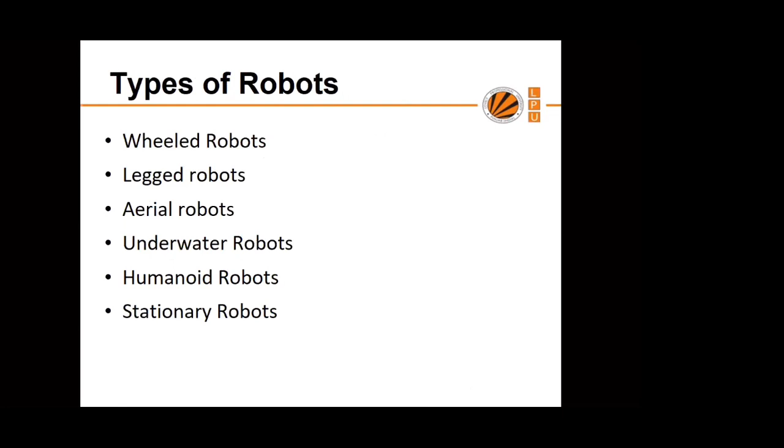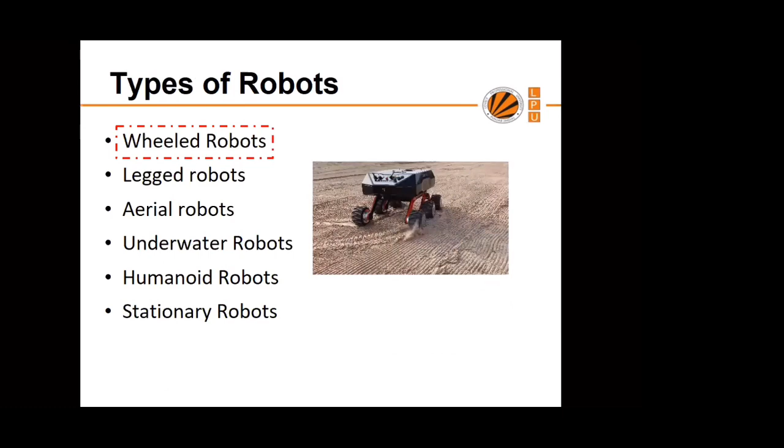So as I already mentioned, there are different types of robots. Some are wheeled robots - this is one example. Robots that perform tasks and have wheels, we can categorize as wheeled robots. Then as legged robots - instead of wheels, if a robot has legs...

...then we can term it a legged robot. It can be designed for different tasks, whatever task you want your robot to perform.

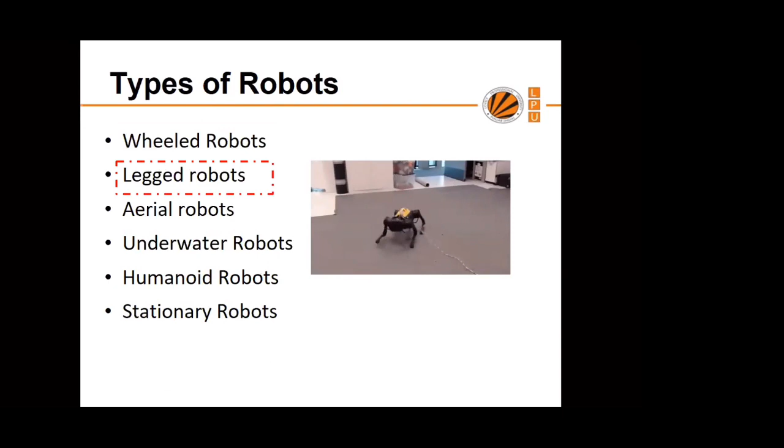It is just designed based on that particular requirement. Then aerial robots - I think you might all have seen drones, and drones are basically aerial robots.

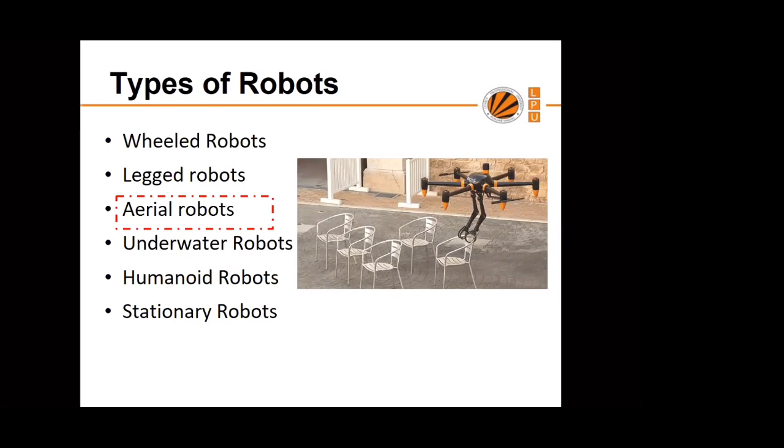Here is one example of a drone, or aerial robot, taking a chair from a particular place and keeping it somewhere else.

After that, we have underwater robots. Underwater robots are basically for the perception of the underwater environment and about aquatic life, so for those we require underwater robots.

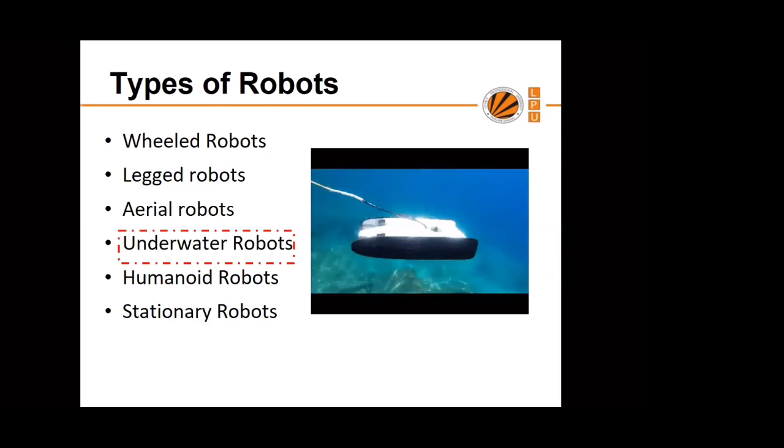After that is the humanoid robots. Humanoid robots, as the name suggests, will resemble humans, and they will be designed based on some artificial intelligence techniques...

...so that they can resemble us, and they can perform tasks as humans can, but with high speed and more precision.

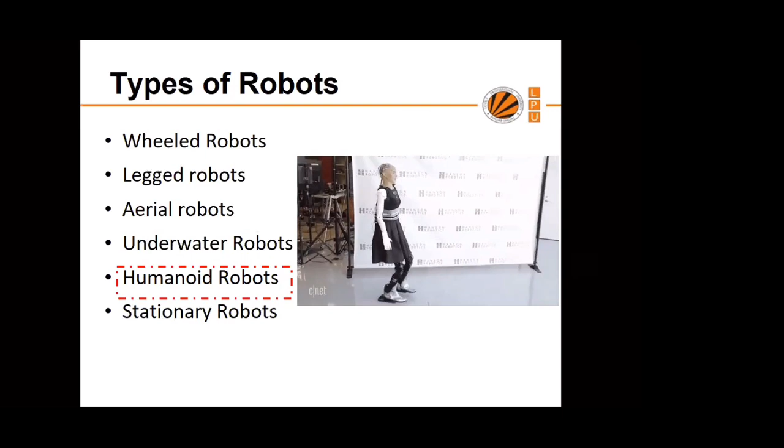After that, it is not always like that the robot should be moving. It should have some wheels, legs, or some humanoid effort so that it can move from one place to another. But some robots are stationary also.

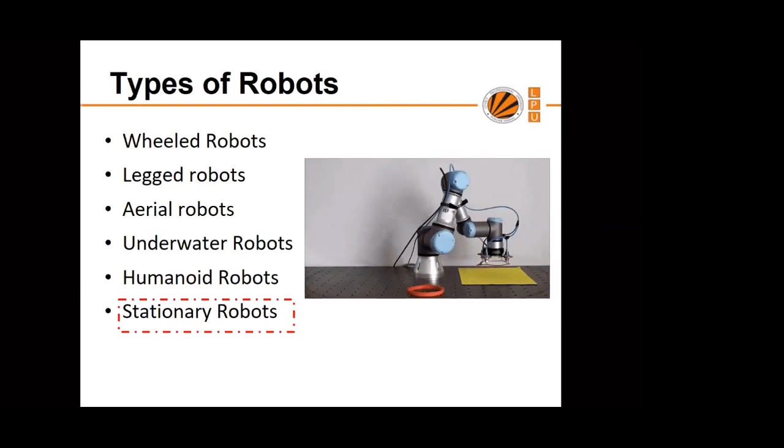We will be going into much more detail about these stationary robots in today's webinar. Stationary robots are those robots which are fixed at some place, but they are performing some task. Like you can see in this picture, a robot is fixed at a place and is picking and placing a particular thing from one place to the other. This type of robot is basically known as a robotic arm or manipulator.

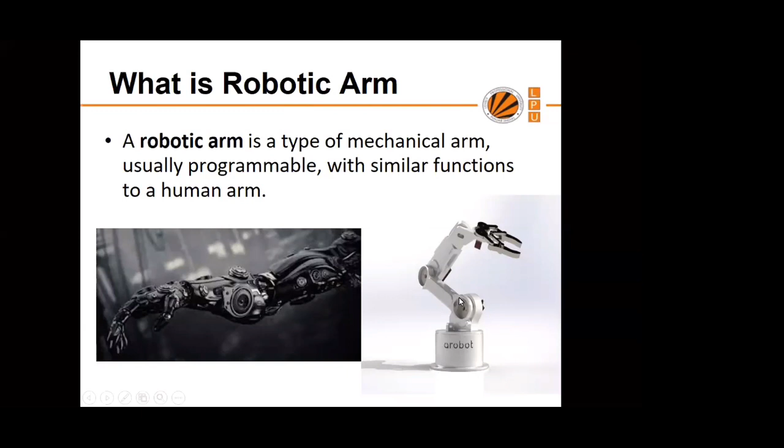There are different components of a robotic arm. The first one is joint and actuators. If we want some mechanism like our human arm, we will have some joints, like our elbow - that is one joint in terms of robotics. That joint is required so it can connect the arms. The shoulder is another joint, connecting with the elbow. In between the shoulder and elbow there is some segment, which is termed as a link.

After joints we require some actuators, because we require some mechanism which can move that particular joint or link. So for that we use motors.

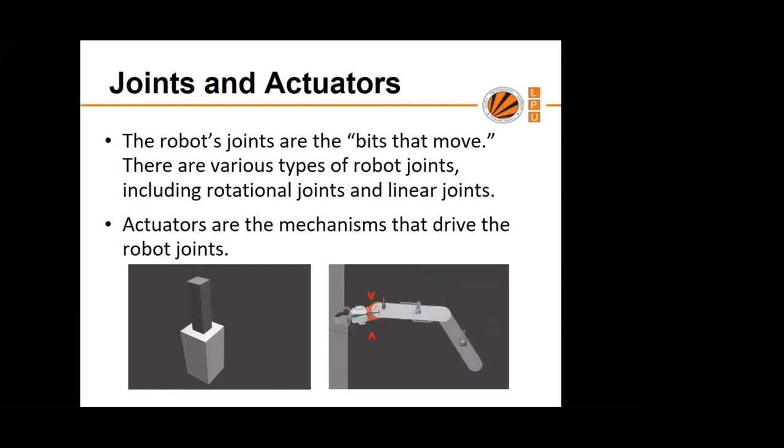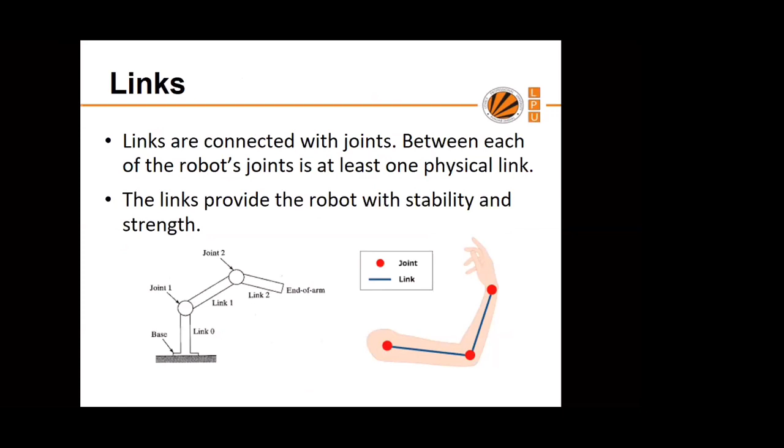After that is the links. As in the right image, these red points are basically the joints, and in between these joints we have one segment, shown in blue color, which is known as a link. These links are basically interconnected between two joints, so we require at least two joints to connect one link in between.

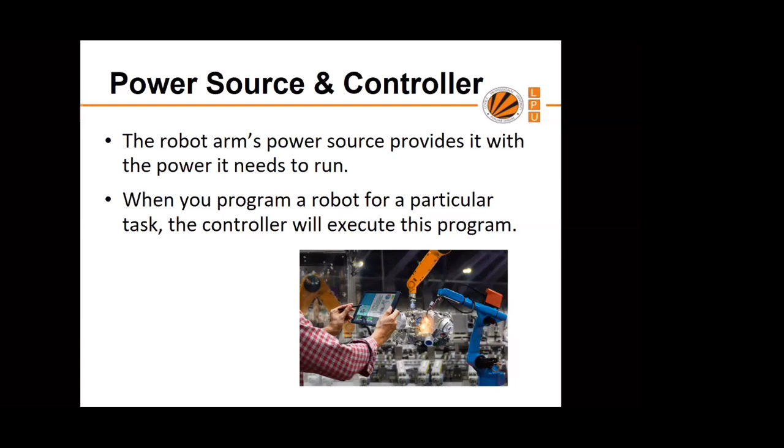After that, obviously, power source and controller, because without power we will not be able to initiate any action or task with the help of a robotic arm or any type of robot. The controller basically executes all the programs and applications that we have designed, and with the help of the controller we can execute all the tasks.

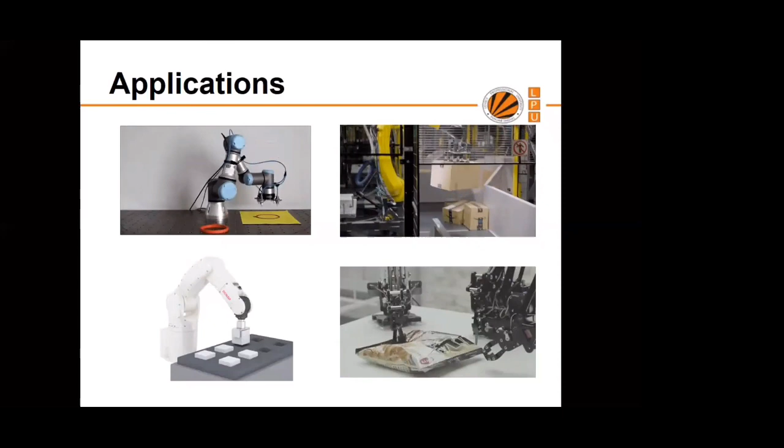So these are basically some of the applications, like picking and placing an object - you can see in the right image that the box has been picked up and placed somewhere. Then there's stacking, and packaging also. These are basically industrial applications where robotic arms are used these days.

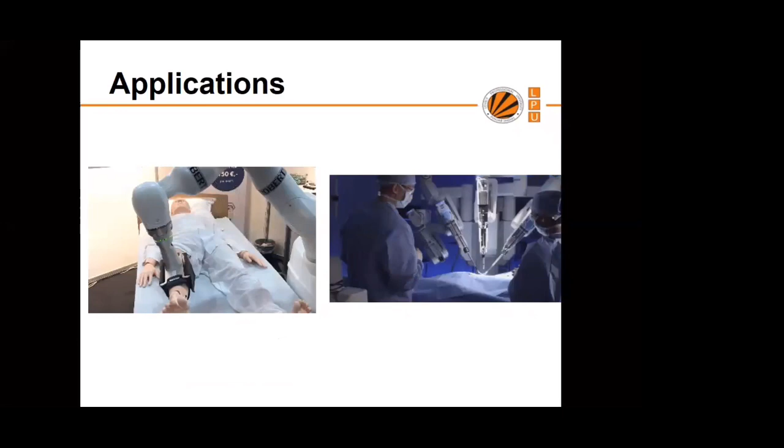Another application is in medical for rehabilitation and for surgeries. These days in the medical field we are having robotic arms to make the work more precise. Then in industries, like automobile or car industries, we actually have robotic arms so that at a single moment we can have multitaskable performance in a particular industry.

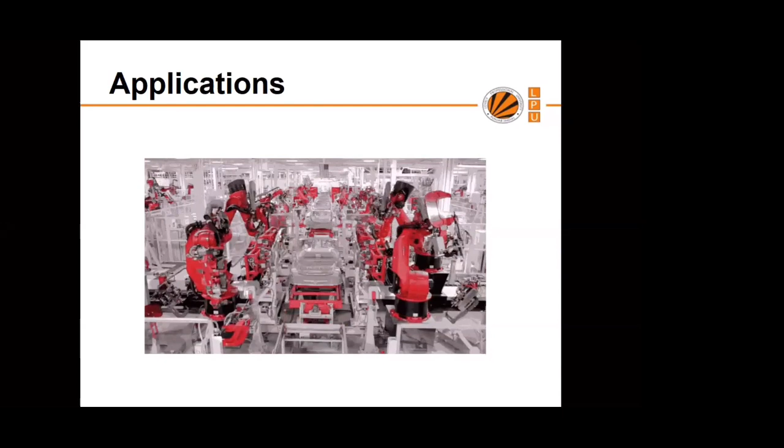I will now be showing you one of the manipulators that we have in our lab. Just let me open that.

Right now I will be showing you how we can make this robot teach. I will be teaching it, and then I will be letting this robot perform the same task. So for that, I'm sharing the screen for this robot controller. This robot is basically having multiple tasks, like it is...

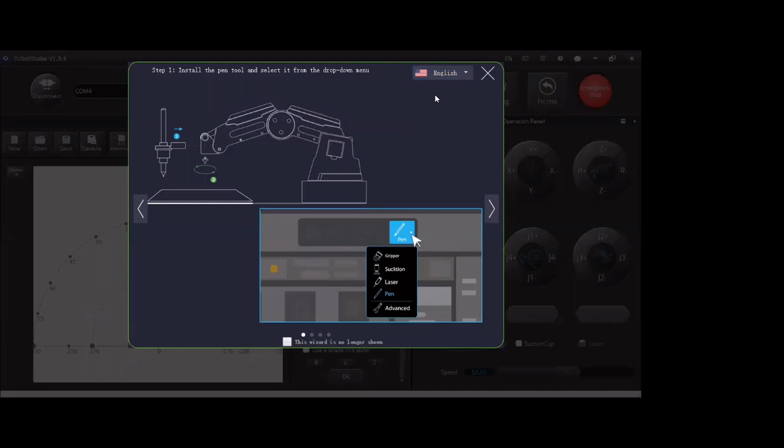Now I will be showing you how we can write and draw things, whatever I want to write or make the manipulator draw, with the help of the manipulator itself. This is basically the interface where we will be writing or drawing something, or if you want to make this manipulator draw some character, you can take that image and incorporate it into this window you are able to see.

This is basically the area where this LPU, you can see, where I am making it rotate. This is the area where your manipulator can write, the region where your manipulator can easily write or draw something for you. So what we have to do in this case is, obviously, as right now the end effector is connected at the end of the manipulator, we are having this suction pump.

And with the suction pump we will not be able to write anything. So what we have to do is change this tool from the suction pump. We will be changing it to a pen or pencil with whatever we want to draw or write something.

So what we have to do in that case is first input some text. Let's suppose I want to print LPU. So I will be writing the text I want in the input text field. I have written LPU over here.

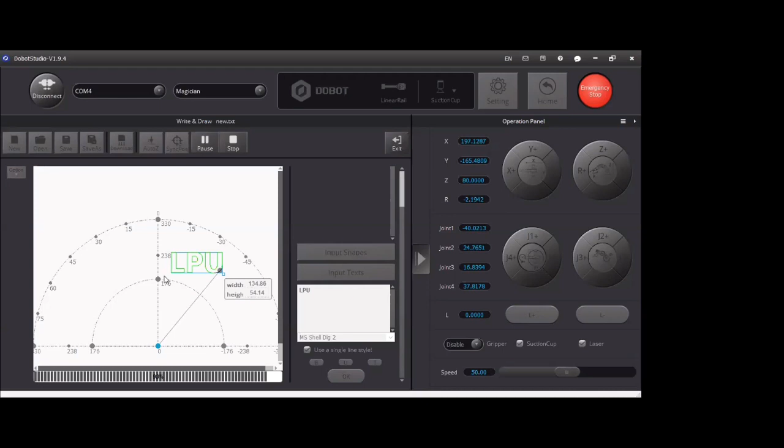Yeah, so it has printed LPU, as you can see over here. This is what is written by the robotic manipulator, the same thing, LPU, as you can see. I hope it's visible. Yes ma'am, it is visible.

Okay, so see, with the single manipulator we can perform so many tasks. So this is about the real demonstration of this manipulator. Now, I would like to share one more thing with you, that the same manipulator has been designed by our students. So just have a look at that in this video.

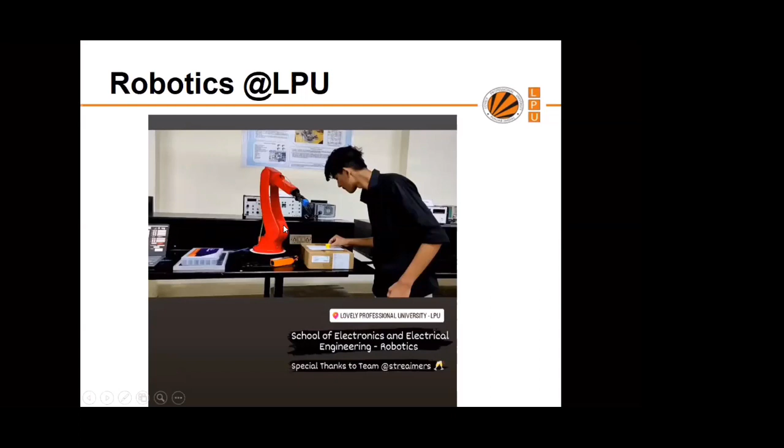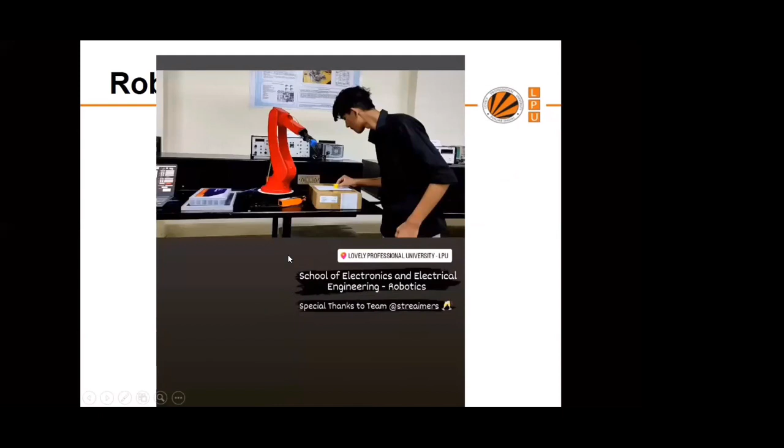Ma'am, I believe there is some kind of technical issue we are facing. Yeah, it's a picture, not a video. I believe so, yeah, I think there is some issue with the internet. That's why it is not getting started. Apart from this, ma'am. Okay.

So you can see over here, this is the manipulator designed by the students of our own university, and they have actually made a robot which is doing the same task of picking and placing. So yeah, that's it from my side. Thank you so much.

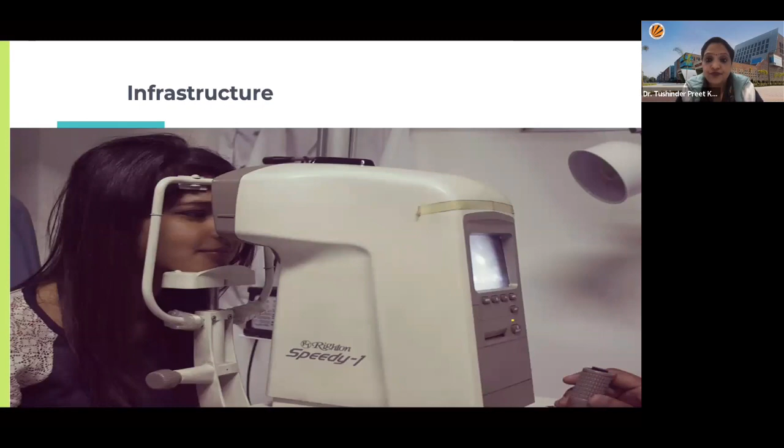Those who are gym freaks, we have a gym for them. We provide wide facilities like sauna bath, etc., and trainers are there. We are worried about your health as well, so we do have Uni Hospital with 24/7 beds available.

I'll take you to the website where I told you I'll tell you how to save your money. Okay, I'm visiting the website, you can note the link, it's lpu.in. So once we visit the website, there I'm going to click at admissions.

After clicking on admissions, I'm going to the UG programs, that is after 12th. Then I am going to select the discipline, because I'm introspecting that you all belong to engineering or have an inclination towards the engineering discipline.